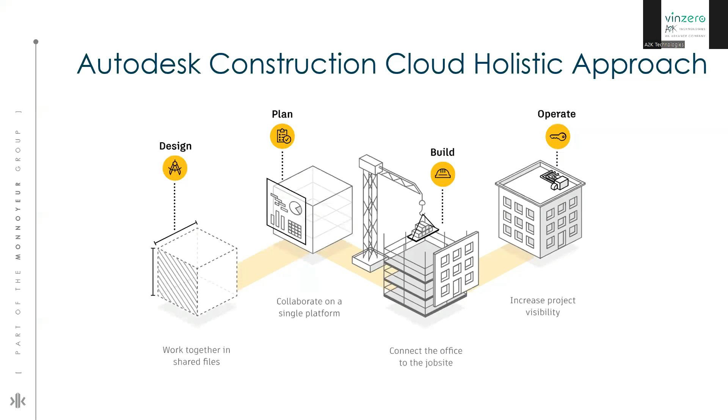There are, for all of these tools, pretty much 2 processes. The first one is the configuration aspect, where you have a project admin setting up all the tools, creating all the information layouts, creating all the information containers, allowing people to access this information, restricting this information to some of them. And then you have the execution, where you have individuals collaborating in the process.

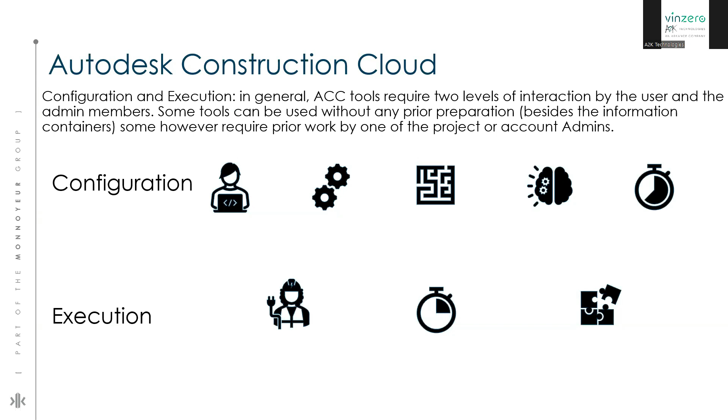For today's topic, the configuration aspect actually is very minimal, because what we're talking about is execution. We're talking about having the data, having access to the data already, and executing certain tools in the data. And that's the reason why today's webinar is very, very focused on markups and review process. From there, we take it to other tools like issues, for example, that require some configuration, but we are not going to focus on that configuration today. We're going to focus on how the markups and documentation reviews tools are allowing us to expand on these other tools within ACC to achieve a very, very powerful level of collaboration and execution.

Now, again, for those who are very new to ACC, this is not an introduction webinar. This is not a webinar where I'm going to introduce you to what is ACC. This is a webinar where I'm assuming all of you know a little bit about ACC.

So there are certain workflows, again, that require certain implementation, certain, let's call it arrangements or configuration. For example, a review process where you submit a file for review. Now, in your case, it could be that you are going to be part of the submit process, that you're going to be asked to review a document.

And this is where the process you might be involved could start. Someone, a PM, a collaborator, a third party might send you a request for review of a document. And that's what we're going to do in a moment. So you need to understand where does that coming from? Well, that happens because someone has a document file that they need you to provide input on.

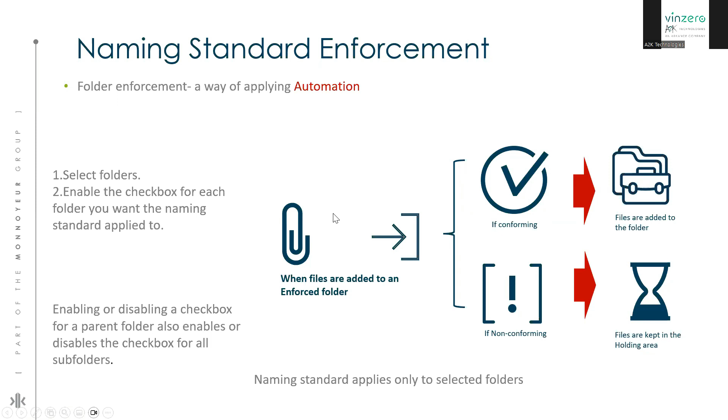I'm not going to dwell too much on this, but some of those rules depend on the project allocation, where the files are going to be, how those files are going to be managed. Maybe you don't need to worry about it so much, but just be aware that's something you need to consider when managing files.

Now, the visualization aspect and the status of the information. Again, this is a little bit of theory before I jump into the practical. Every stage of the information in the process can be very clearly defined.

It could be that the information we're in is a work in progress. Usually we're talking about design work. It could be a preconceptual design, pre-construction design, where changes are going to happen very often and they're well received. It's not a stage where things are settled and defined. It's a stage where things happen.

Again, our revision tools, our digital markups play an important role in this aspect.

Now, the shared stage of the information, which we see here, is when the information leaves the silos. It could be an individual, it could be a group of professionals with the same background that start collaborating between each other. I call this leaving the silos because this is the part where the information doesn't belong to you anymore, it's being sent to someone else.

And again, markups, reviews, that kind of digital feedback is very important here too. Maybe not at the impact that it could have in work in progress within a team, but it does have an impact.

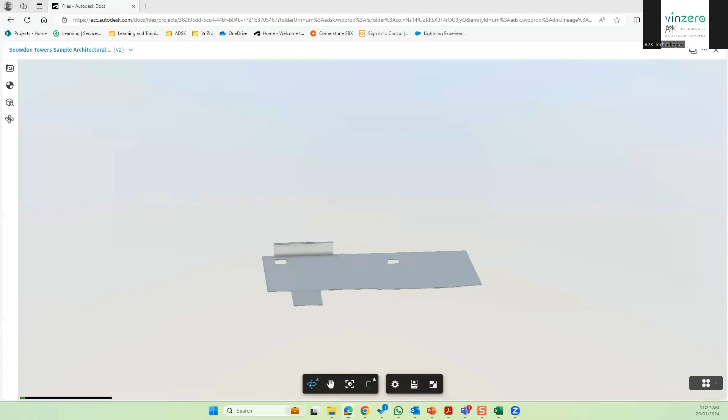So for example, if I open this file, I go directly to the file. And this is the navigation tool - this is the navigation user interface that is going to allow me to see the file.

Now, remember a moment ago when I was talking about the way information is shared, the way information is reviewed. And I mentioned one of the current processes is that model review relies on who can use the desktop application, if they have it, of course. In this case, it doesn't really matter.

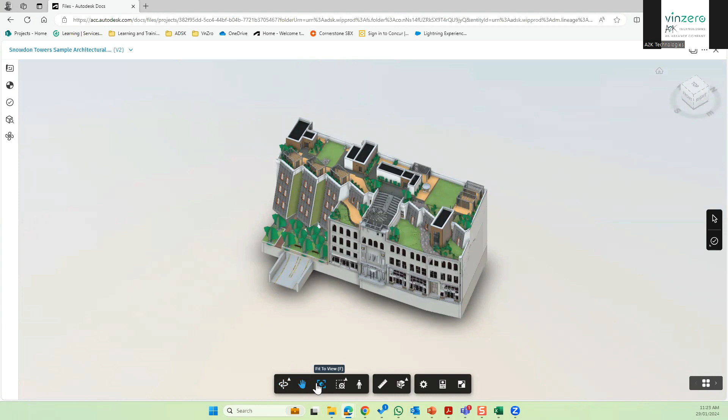You can open this on your phone if you want to. It's an easy URL, very easy to navigate, very intuitive. You can choose pan and orbit, fit the view, zoom in, zoom out, first person view, whatever you want to do. And the point with this tool is that it allows you to review your file - I'm not going to call it drawing, your file. So what do we have here? In this menu on the left side, the sheets and views menu here.

Okay, we have a question from someone. I think everyone can see it. It says we have large drawings, X reference, aerial photos. Harry Thompson is asking this. I'm going to put the question here.

What I'm showing here right now is a Revit model because my demo is very narrow. I cannot go through all the possibilities, but you can open photos here, very large photos, and you can open point clouds too. I love working in point cloud files.

That is scan data from laser scanners, and you can review it here. There are many options to do this. When you talk about a large file, to be honest, I have seen files that are extremely large, multiple gigabytes of data for Revit, which is not recommendable. But a file that is 500 megs or 300 megs, you have no issues about it.

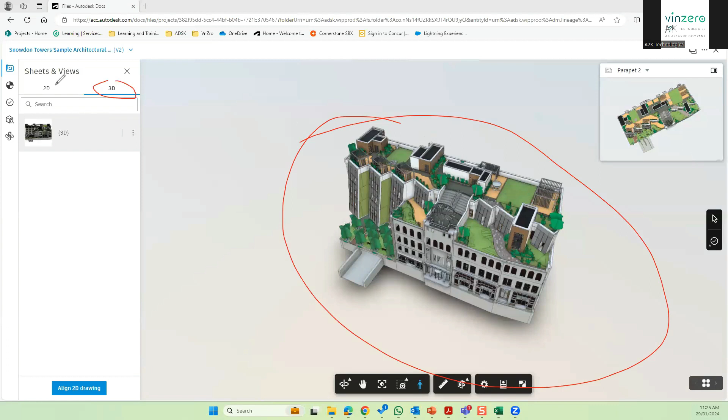If I go here for the 2D drawing version, I'm going to clean up the drawings and switch to the 2D. In this case, there is no 2D, because of the way the model was exported from Revit. But what I want to focus on is this menu here. I'm going to bring a 2D drawing in a moment.

Then you have the levels. You can start navigating the file and all the content. This tool is being designed to be a partner for people modeling in Autodesk products, of course, but that doesn't mean it's limited to that. I'm going to show you later.

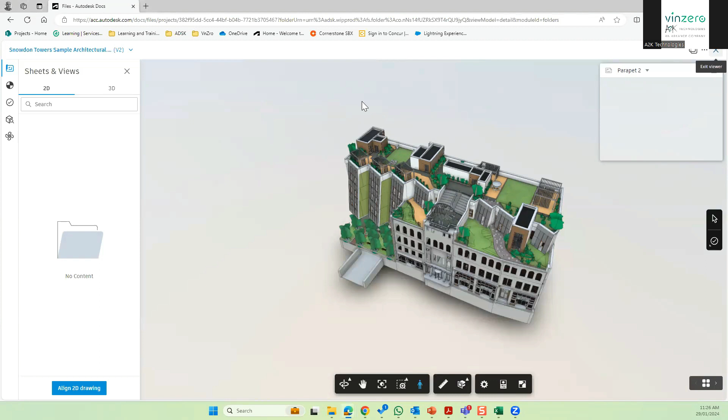So the first point I want to make is how the tool allows you to see 3D drawings in this case, and how it allows you to navigate those drawings. What I'm going to do is close the view, exit the viewer, and go to the next drawing.

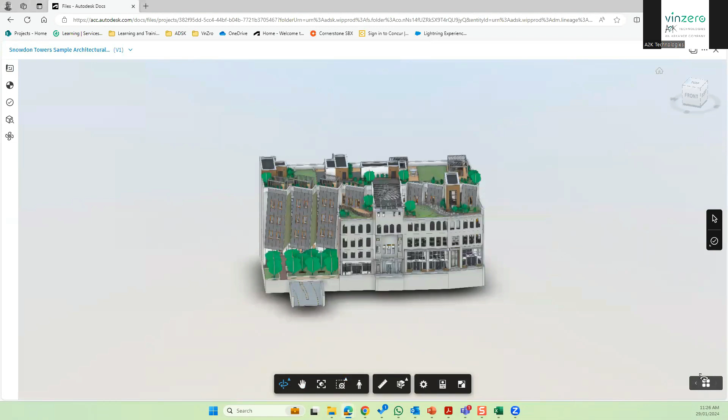It's opening the drawing. I'm going to see if there are 2D drawings or not. There are no 2D drawings, there is a 3D model. So I'm going to jump to another file. Again, this is for navigation. There are multiple things you can do here in terms of navigating.

You can create a section. Now what I'm going to do is go to my other folder, and quickly show you what happens with these Microsoft Office files. You can open them there, so don't feel limited by the tools that you have.

What I'm going to do here is bring a file. I'll take a file from my computer and bring it here. There are two options for doing that: you can upload a file, or publish a file from Revit, or just drag the file and bring it here. I'm going to navigate to find it.

Just give me a second while I navigate to find the file I want to bring and show you what it's like. Okay, so this is the file I want to open in ACC, and I'm going to show it to you in the Acrobat Reader, the PDF reader, first. So this is the file that I have.

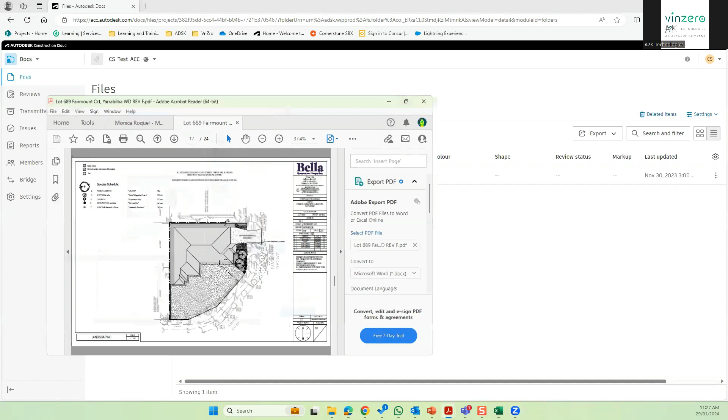I'm explaining this all in the context of my background as an architect. Let's say I have a house and the owner is asking me to help design the swimming pool area and the landscape. There are multiple ways of doing this. I could just print this out and work on it, export it to Revit, or even use the Acrobat Reader and work on it with some of the tools we have here, very poorly, to start sketching what I need.

But that's not what I want. What I want is more tools to do digital drafting, digital review, and also to keep the file within the project. That's something we need to understand. When I keep the file in the project, I'm bringing a high level of confidentiality and protection to that information. While if you exchange files back and forth, they become available to anyone who has access to those emails. There is another important aspect.

I'm going to first bring the file here. I could just drop it here, right? So I'm dropping the file.

And it's telling me that it's a file from my computer, a 2.8 megabyte PDF file. So I'm going to tell you an experience that I had when COVID happened.

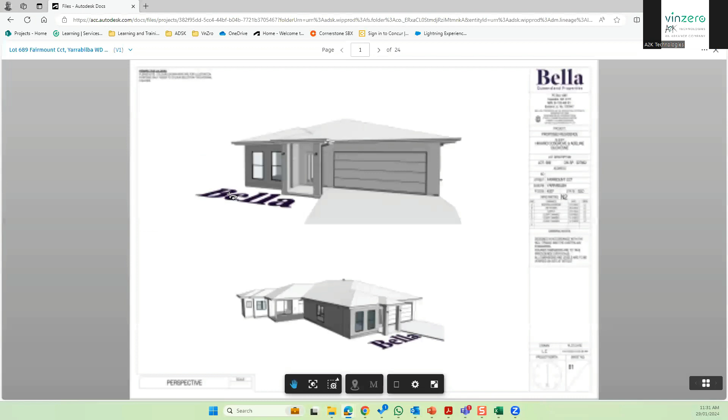So what I'm going to do here is, I have a drawing here, right? And I'm going to click on it. If you notice already, that is a PDF drawing, not a model. What you see here, there's no 3D option because I'm opening directly a 2D drawing.

Most people work with this type of document for the topic we're covering today. The reason is because a lot of companies are still printing this out, reviewing it, and scanning or taking a picture of it, which is a very dangerous way of working.

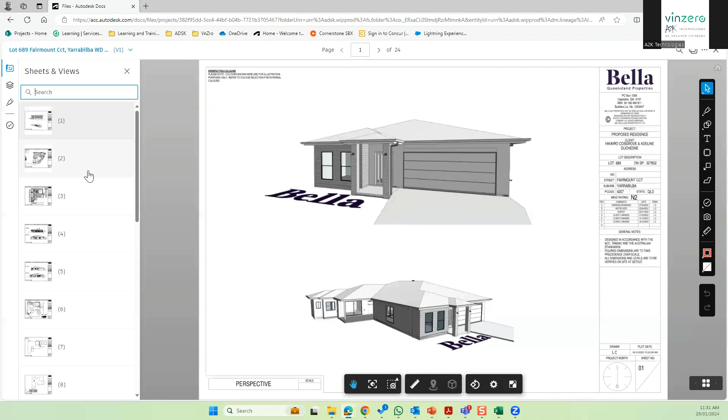Now I have my drawing here. By default, the difference between opening this drawing in ACC and opening this drawing in Adobe Acrobat is that here, of course, I have the pages and everything, right? But in ACC, you have the pages in separation. I'm going to show you one of the biggest differences.

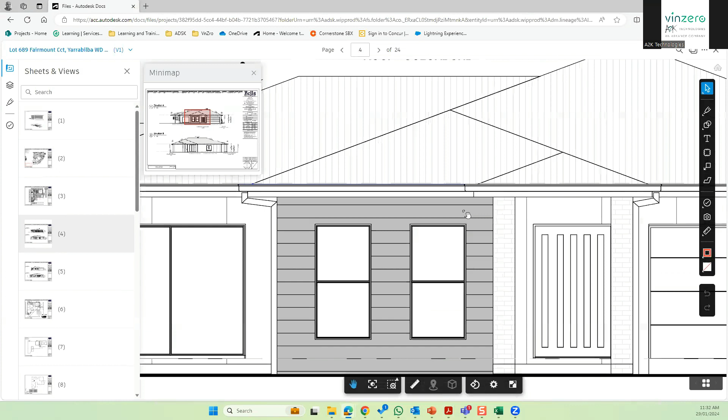When I zoom in, the quality remains the same. And I don't know if you can see how I'm clicking on objects - the drawing is recognized as such.

Now, this drawing, actually, I wanted to make this demo more realistic. This is a drawing that was given to me - it's not something that I generated. This is actually a drawing from a friend. I asked them if I could have the drawings of the house so I could do this demo, and they said it was fine. This is literally a drawing that was given to me.

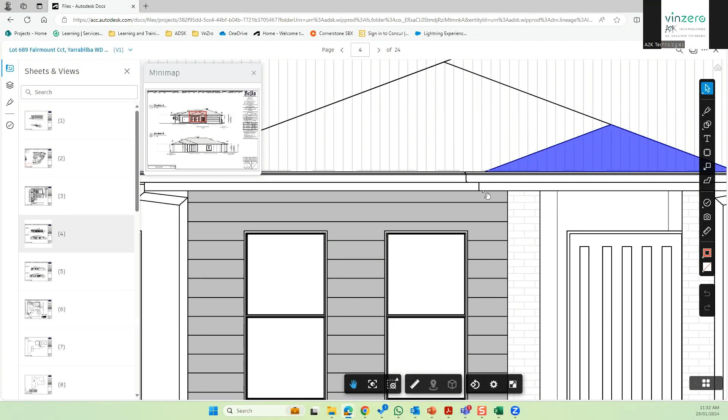I had no idea when I got the drawing if it was properly done in Revit or AutoCAD. That's a situation you might be in. But in this case, it's not a scanned drawing from an image - this is an actual drawing that was created in a CAD software.

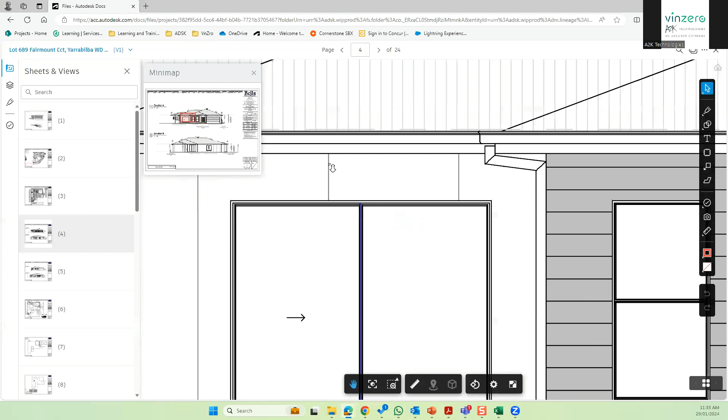So this is the situation you're probably going to face, where you have a drawing and Autodesk Construction Cloud is going to allow you to touch on those elements of the drawing as you go. But that's not what we want to focus on today. We want to focus on what I do with this.

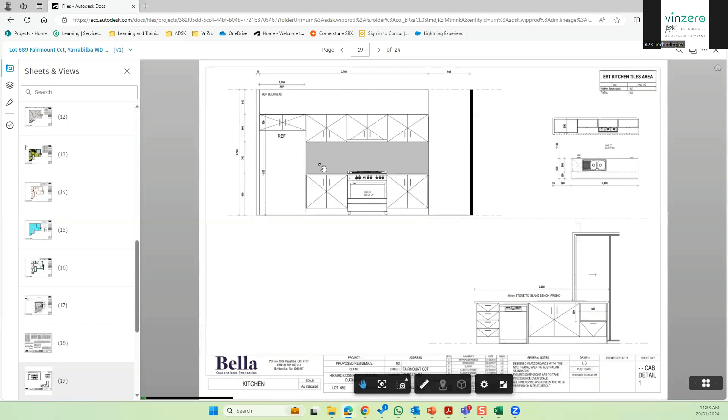How do I provide feedback to my client on the changes that I want? It could be something very simple. You can even send this to your own client, and the client can tell you just by making changes here what they want. They say, okay, this is too high, right? They can draw a line and tell you this is not what they want.

Let's say we're not talking about a professional, we're talking about a client. They say, no, I don't want gas, I want electrical. I don't want electric, I want gas.

People can draw pretty much with the basic tools that you see here on the right. I'm using the marker, and I'm going to navigate all these tools one by one. I needed to give you context of these tools today, but to be honest, these tools by themselves are very complex in terms of how much you can do.

It's very easy to use them, extremely easy. But what you can do with this is incredible. It's very, very, very rich.

So I'm going to just quickly navigate through the tools that we have. We have selection, which is what I used a moment ago, right?

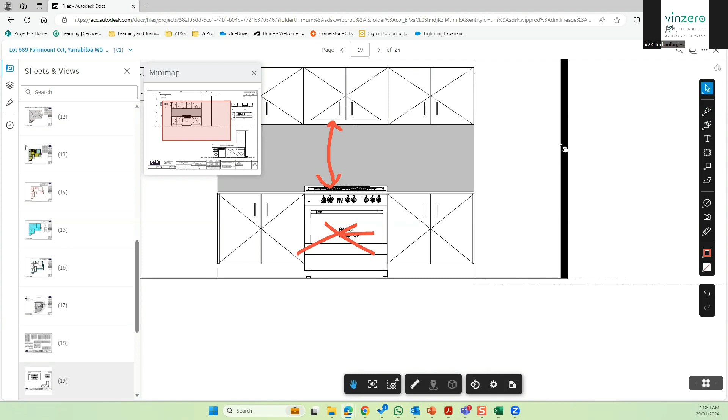And then you can go and select objects. Now, if that object is that you select, remember, you need to always remind yourself, it's a drawing. It's not a model, it's not an element. You can highlight it, you can touch it, but you cannot move it because it's like if you were working on top of a piece of paper.

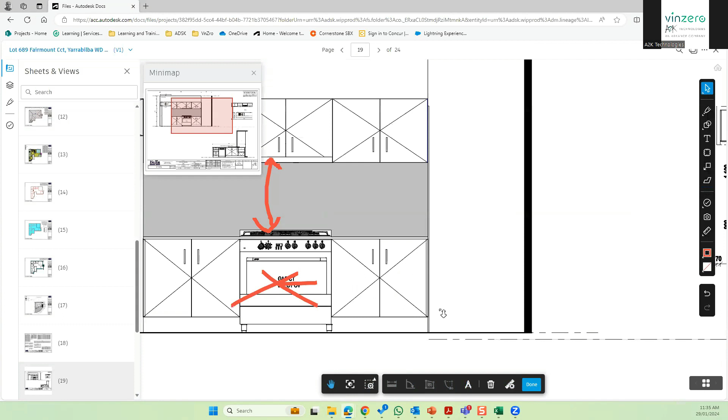I'm not going to go into this anymore. What you could do is you could measure things. So if I want to go and measure something, I can touch those objects and use them as a reference to measure. Now, in this case, if you notice at the bottom, it's not letting me measure anything.

The reason is because I need to set up the measurement settings. In this case, I'm going to use millimeters with a precision of 0. And there is an option for free measurement. I don't like using free measurement, I like to use it with references.

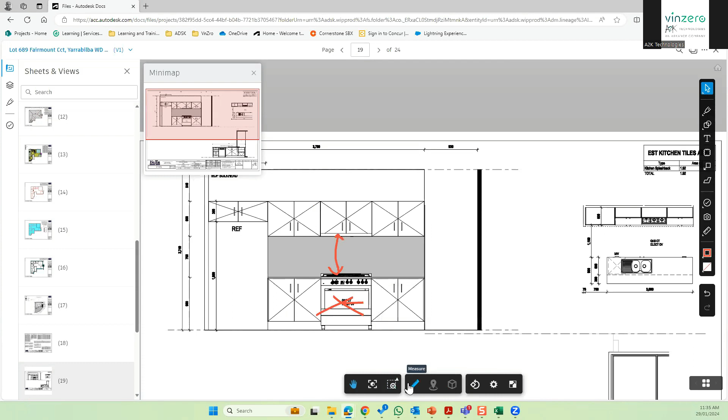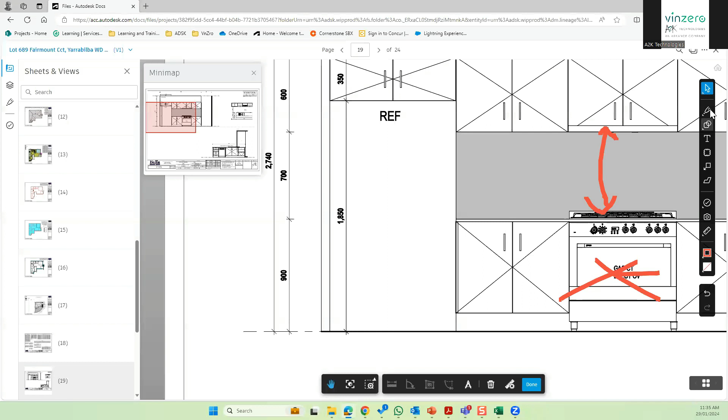I say done. And the other thing that you might have to do, again, as I said, this is a drawing that I received, I didn't create it, and that's most of the scenarios you're going to see — you're going to have to calibrate it. How do you calibrate? You only need one measurement. So if I go here and I touch this object...

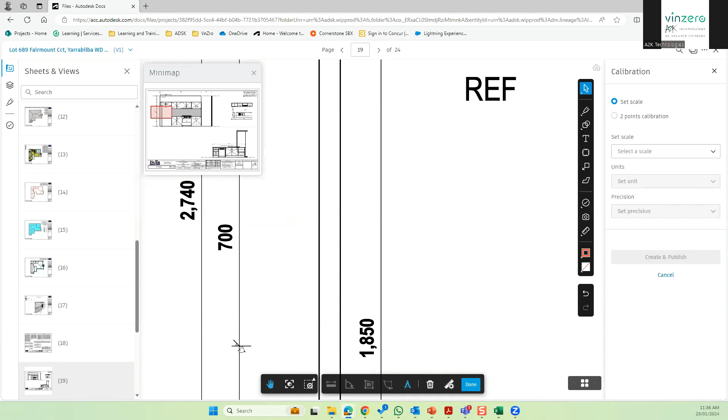When I calibrate, so I'm going to set the scale, 2-point calibration, millimeters, this point to this point. This is one option to calibrate the drawing.

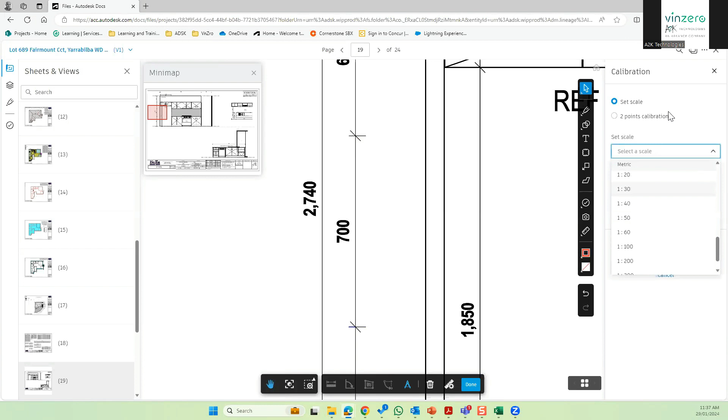The other option is — I'm going to click this again. You need type precision. Select the scale. You can select the scale of the drawing if you have it. You can select the units, and then you enter.

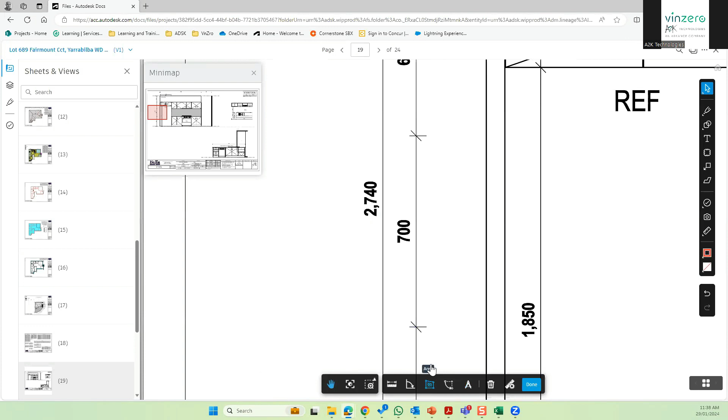And this is just one of the things that you might have to do, but most of the time we're expecting you not to have to do this, because the drawing should come calibrated already if it was generated in Revit. In my case, this drawing was probably not generated in Revit, even though it has the measurements and all the objects. But if you see now that I measure freely, I have the option at the bottom to measure, I can drag. Now I have the measurements missing by 1 millimeter in this case.

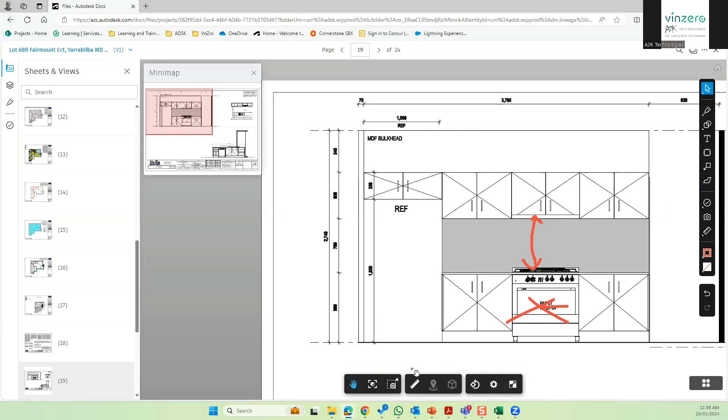I was rushing a little bit with the drawing, but you get the point. What I did is now all my drawing, no matter where I measure, this drawing specifically is calibrated. Now, that's not the case for all the drawings — you might have to switch the scale accordingly. But again, 99% of the cases, if this drawing was created properly in Revit, for example, you won't have to worry about it, you can just measure freely.

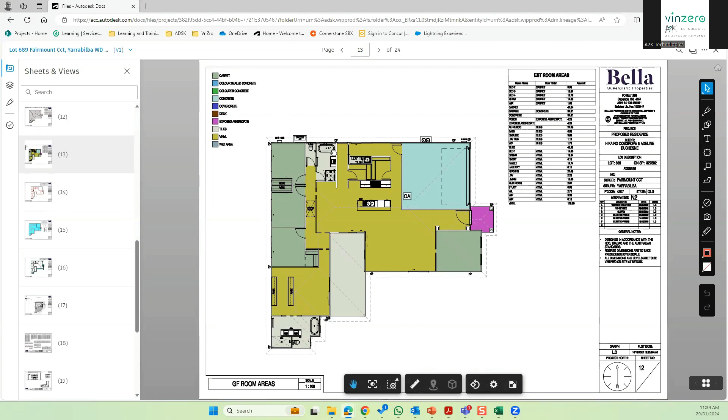I'm going to do that in a moment with the 3D model. What I want to focus on now is, if the worst case scenario is that your drawing is not calibrated, you can always do that — there are other tools. In this case, the 3D navigation tools are not available, of course, because it's a 2D drawing. But the focus that I want to give right now is I want to work on this drawing.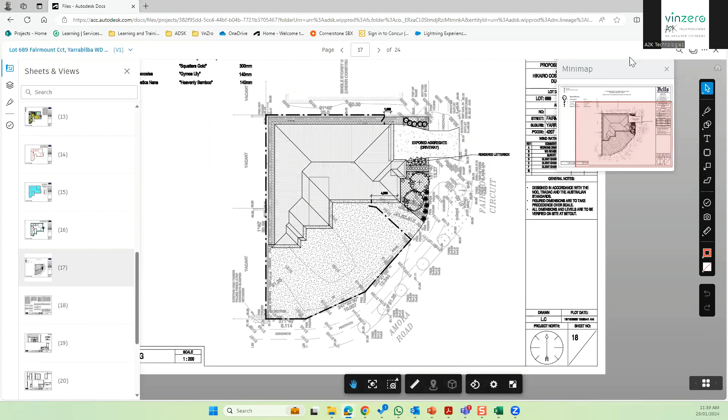I want to start creating things in this drawing, and for that, I'm going to zoom in. You're going to have this minimap on top that is going to allow you to see where you are. You can put it aside. That happens especially when you have large floor plans where you're navigating, let's say, an office building, from one place to another, and you forget where you are.

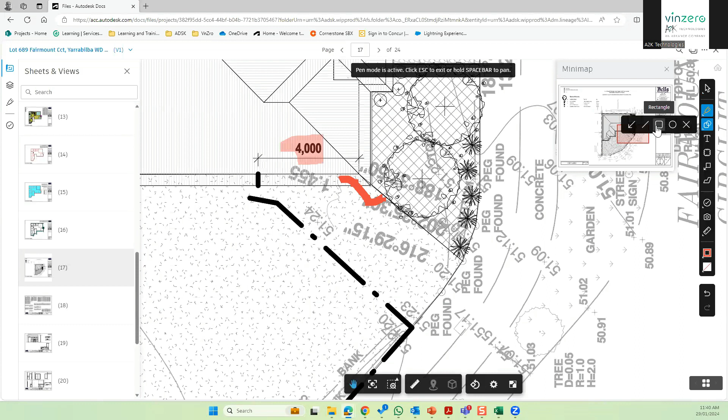This one is very simple because all we have is a roof plan and some landscape, so it's almost impossible to get lost. But what I can do here is now where I kick in the creative aspect — I start working with the drawing, with the shapes, with the text, cloud tools, callouts. These are the main tools. I can create a polygon, and I'll talk about this in a moment, issues and photos. So with drawing, of course, very simple, you can highlight things, you can draw objects — in this case, freehand lines. But what I want to do here is create a rectangle.

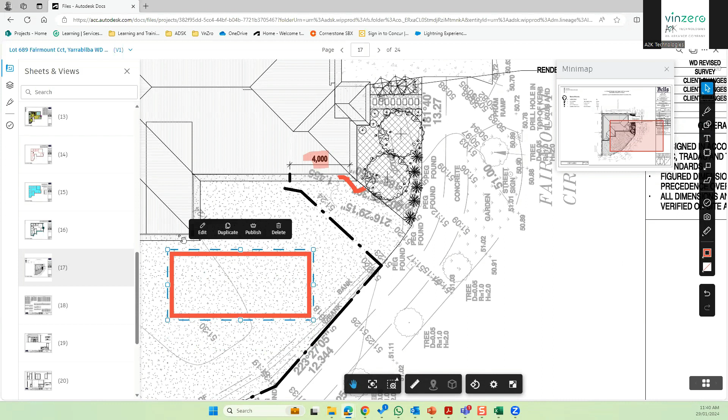So follow me here, please. Now that I have this rectangle, I can modify it. I can move it, I can go and click on it again, and I can edit it. Going to editing, I have all these tools where I can change the color of the edge, the opacity of the line, the thickness of the line, and I can add a color with a certain level of transparency.

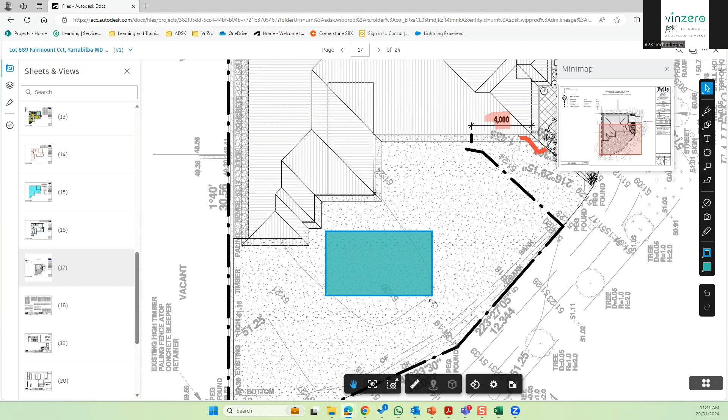Now, this is just a rectangle. So let's say I'm suggesting they want to build a swimming pool. They already told me the measurements of the swimming pool, so I'm going to edit it. I'll leave it the way it is, or maybe make it a little bit smaller. And then I can add the text here that says... let me just go back to where it was.

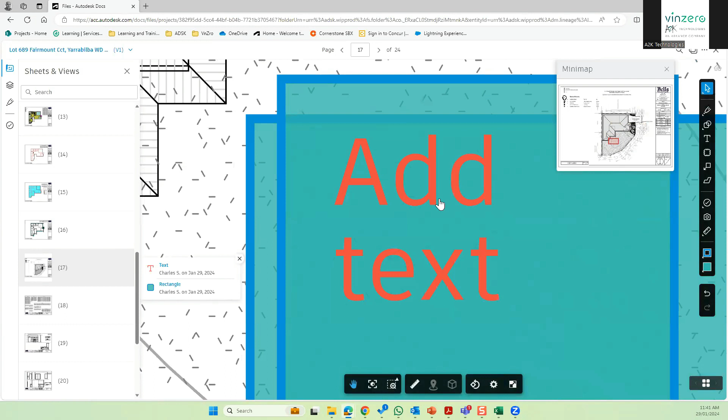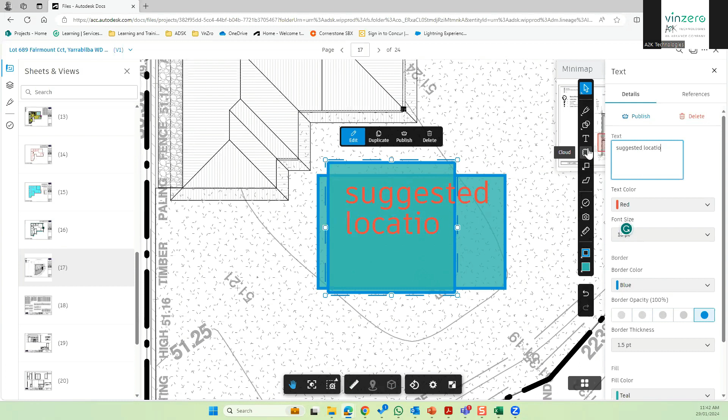Now, if you notice, the text is similar to when you're working on PowerPoint, where the text is going to have a border color, a background color. So I'm going to change the text that says suggested location for pool. Then I'm going to change the color of the text, change the size of the text, and eliminate the border of the rectangle.

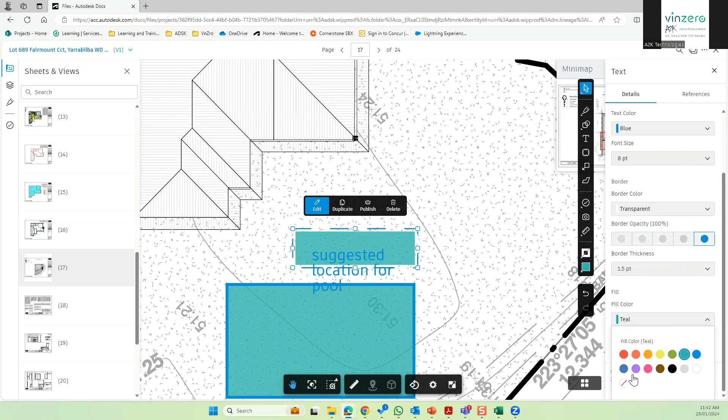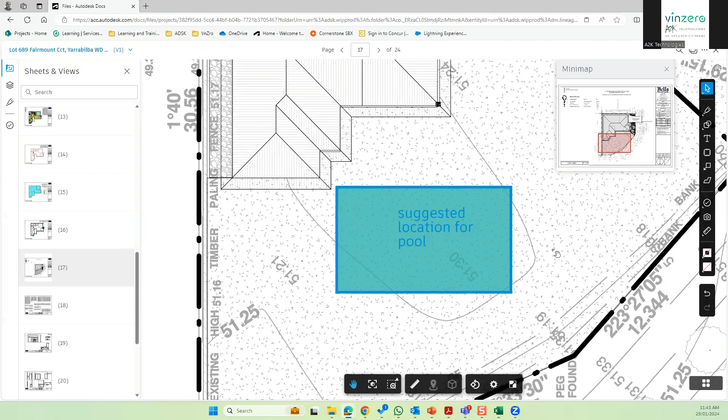And again, you're going to see a similar situation to what you notice when working in, I guess PowerPoint is the best example, where all the shapes that you're creating, and many of you are probably used to working with PowerPoint to create notes on an object. So now I'm going to take the pool, put it down here, and there you go. So I can say, okay, this is the suggested location for the pool.

I've seen examples, and because it's time consuming I can't go through all of it, where the architect actually goes and designs on top of the drawing using all these tools. Now, that is not the purpose of the tool. For that, we have AutoCAD, we have Revit, where you can actually design. But you can start working on more creative approaches. For example, you can say, okay, I'm going to have this area as an area with trees. You can use multiple shapes to suggest, let's say, trees.

In this case, I'm going to modify it. Once you create it, you click on it, you edit it, and then you can start modifying the colors. So let's see, I'm going to use green, and here I'm going to use green too. There you go. And you can take this and duplicate it.

And let's say this is going to be the adding of trees, where you're going to suggest adding trees to the east facade. So you can use text again, or you can use a callout. And with the callout, by default, it's going to bring the same properties. Trees. And then I can just modify the border color to zero, the border color to zero. The text is going to be green, and then the fill is going to be none.

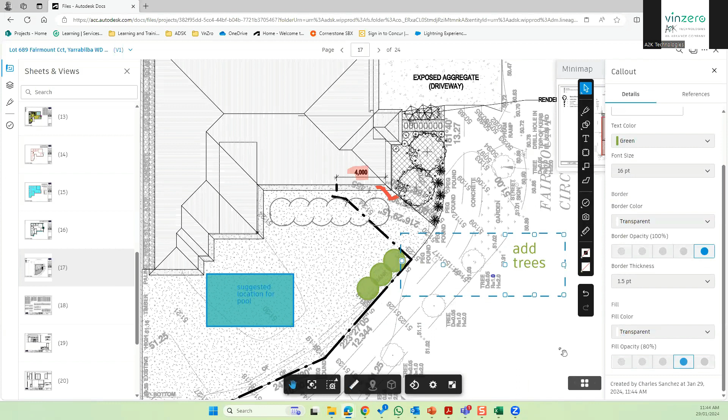So again, I modify everything in the color, but let's go and create a new one here. I can move it actually here. I'm going to change the line, and I don't want to dwell on this too much. There you go. Zoom in. And there you go, I created a callout for that.

And again, this can be used either to generate suggestions, to generate reviews, to create actions. In this case, when creating actions, I could go on and on making changes to this drawing, adding comments, modifying, including data. But one of the tools that is more practical in terms of managing information and generating new actions is issues.

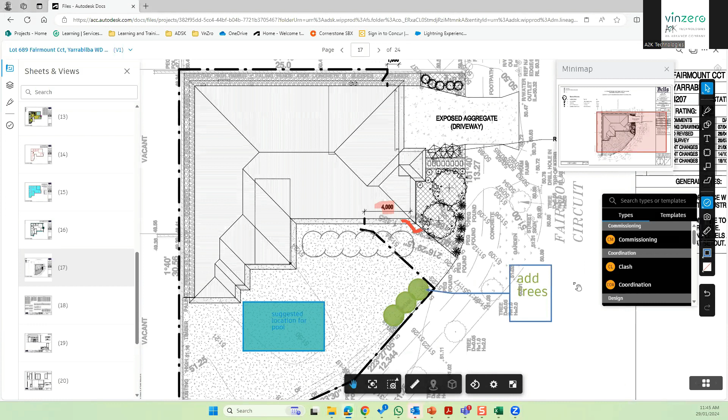Now, what issues are in ACC, for those who are not familiar, is you generate an action where you are highlighting a problem, and you're telling the person who generated this drawing that there is something going on and you need them to do something about it. Actually, I have a coworker who doesn't like the term issues. He likes to call it something like actions to be taken, because issues aren't always something negative. Issues could just be the need for an action. So in this case, I'm going to quickly add an issue to this drawing, and you'll see how ACC allows you to select the type of issue.

So in this case, I'm going to select an observation, and I select where I want that observation to be. Let's say that observation is in terms of the location of the roof against the property line, so it's just too close to the property line. And I want to highlight that I believe this could be taken into consideration.

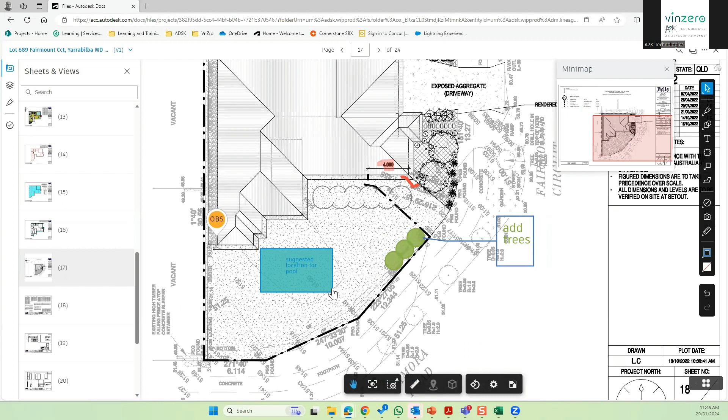So Autodesk Construction Cloud, because I selected the type of issue, is going to write down OBS as observation, and it's going to tell me there is something here. The person who comes and sees this drawing is not only going to see my design notes, right? Trees, location for the pool, highlighting here the 4,000 millimeter line, etc.

I can even delete a markup that I don't like. Actually, I don't like these markups, I need to delete them. But when I go to an issue, I can detail on that issue and I can take actions. I can rename it, I can change the status to something that is pending, is in review, is closed.

And again, this is because the issue is calling other people to take action on it. I can add detail, and I can say a roof line too close to property line, right? So it's just an observation. I'm not saying there is something wrong about it, I'm not saying I want something to be changed.

It's just an observation. If eventually someone comes to the project and says, Charles, but you didn't say anything about it, I said, no, I did. I created an issue, it was an observation. And I asked my coworker, Rahul, to be a watcher. If you don't know what that means, you put your mouse on top of the information logo, and it says that the watcher is going to be a person who is not expected to do anything. It's just a person that is aware of that.

So again, the topic for today is not issues, I wish we had more time to focus on it, but it's a very extensive topic. What I wanted to tell you here is how I can combine my markup tools to expand into other review tools like issues. So I'm going to say, okay, I want Rahul to be a watcher, and I can start adding information. I can even say I want this to be reviewed, I want this to be done by the 31st of January, by this week.

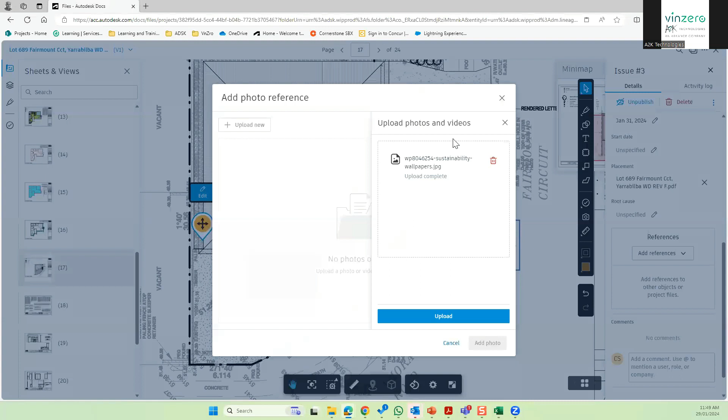So I'm going to add a random photo of a background, just to show you what happens when you add a photo. Now this tool is very useful. If you have in your hands an iPad Pro and you're on site doing this type of markup, which with an iPad Pro and a stylus is very nice to do, you can take a picture on the spot and then add that photo. So this is my photo, right? I already added a photo to the issue.

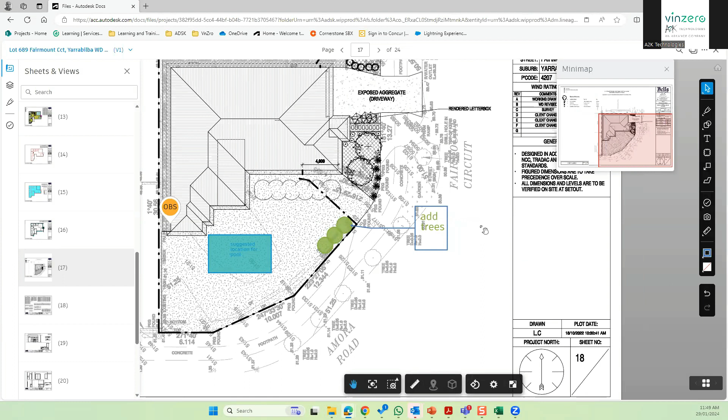And you can keep building and building on the issues. So when someone opens your drawing, they're going to find all these sets of information that are going to be part of your review. If you want to, you can add a photo directly by clicking here.

You select where the photo is going to be. I'm going to select this corner, right? And then the logo is going to be there. Then I can navigate and find the photo, I can go and add the photo. I'm going to upload the same photo that I had a moment ago, just to show you what happens.

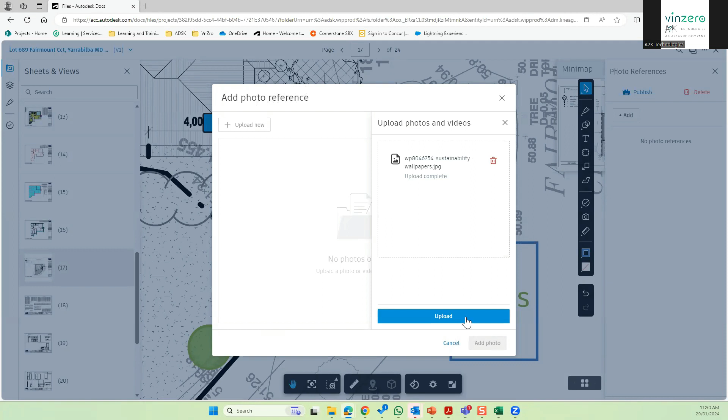It could be a photo taken on site. This is just a wallpaper to illustrate because the green makes it easy to read it. And there you are. So you can have photos in your review, and when you click on it, the photo is going to appear there. And again, on and on and on.

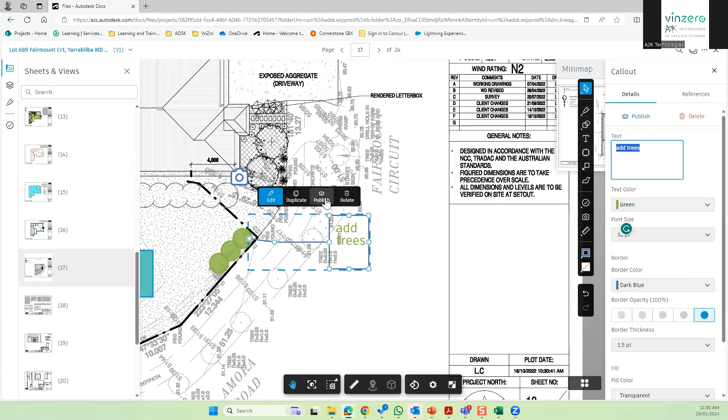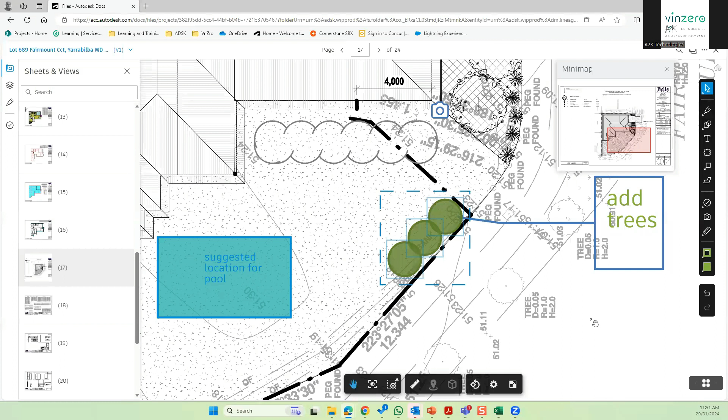And to wrap up, because I want to have some minutes for questions: if you notice, when I do a markup, I have the option to publish it, and it's that little crown that I mentioned a moment ago. So if you notice in this drawing, I have multiple notes, rectangles, issues, drawings, but I'm going to take only these circles, shift and select them, and publish only the 3 of them. So I have 3 drawings published, 3 markups published. I'm going to close the drawing, and now when I go to my folder, I'm going to refresh this.

You're going to notice that this drawing now has markups. It has 11 unpublished markups that only I can see, which are private. That allows you to work on that drawing before people can see what you're doing. And I have 3 markups that are published.

If I wanted, I can also display if I have issues or not, etc. Again, this is a very powerful tool. I wanted to give you some context.

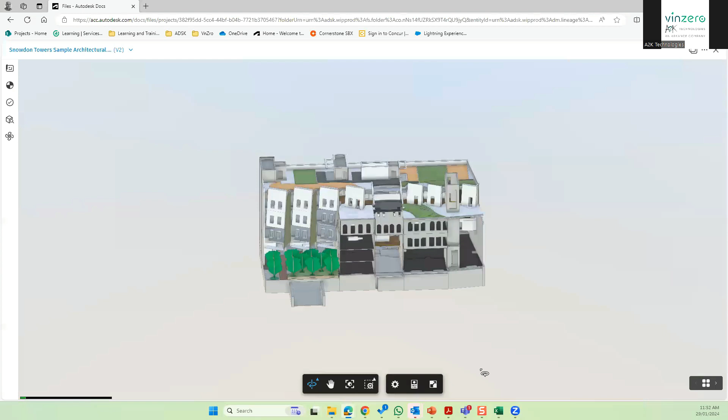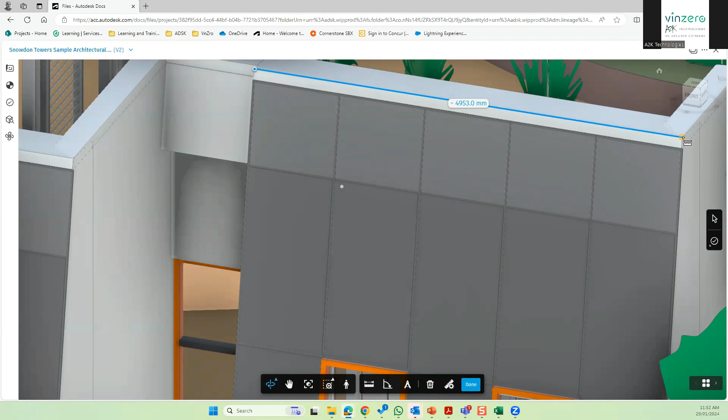You could do exactly the same when it comes to 3D drawings. You can navigate those 3D drawings and extract information from them. If you notice here, because this is at scale from Revit, I can just measure directly. The difference is because the drawing from a moment ago was exported and given to me as a PDF, I need to calibrate it first, and also each page has different scales. But this one is generated directly from Revit and given to me in its original form.

So I can, just like I did a moment ago, create an issue, navigate this, etc. It's just one of the many advantages of being able to see this information in Autodesk Construction Cloud.

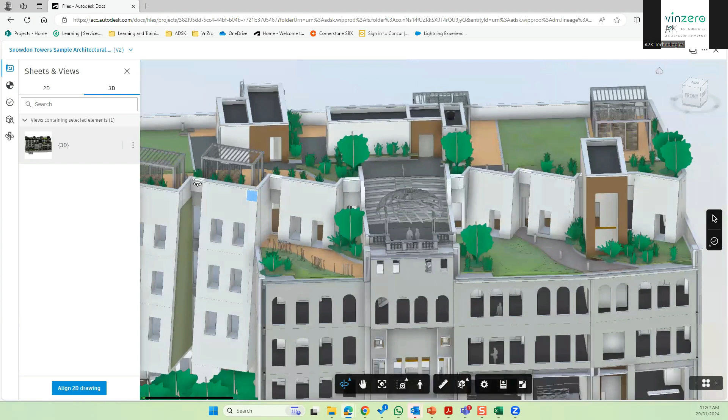I'm gonna stop here and see if there are any questions. I know there is a question about bringing aerial photos into the projects and managing large reference files.

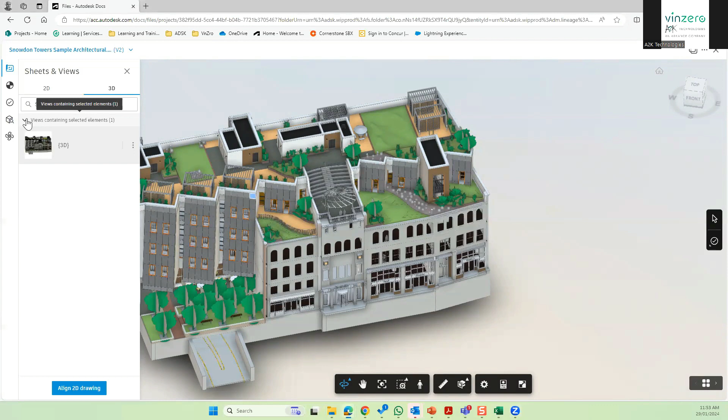Again, you could bring all types of information. You can even compare drawings and make notes on those drawings if you want to. There are many options depending on the nature of your files. What I'm showing you here is the most basic approach, pretty much a native file from Revit, where I have a lot of control over the data. Sometimes that is not the case.

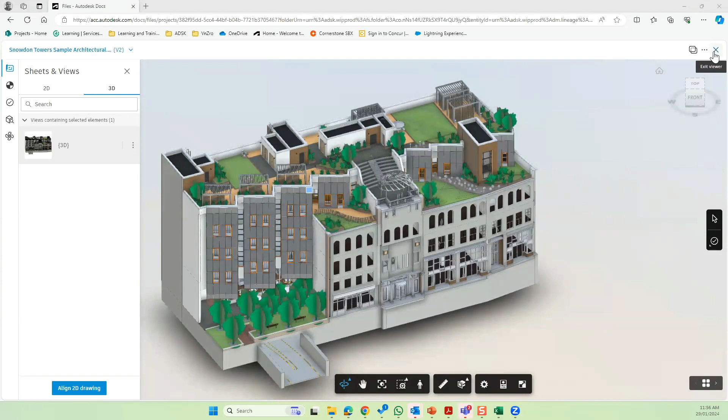So going back to my 2D drawing from a moment ago, when you create a markup here, what's going to happen is everything in your drawing is going to be according to that scale. It's like if you're literally drawing on top of that.

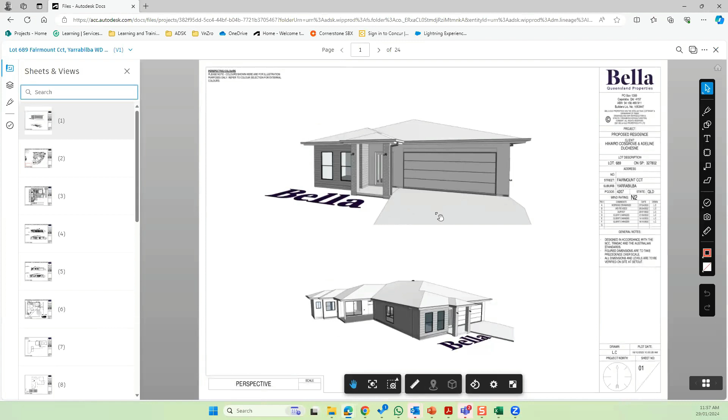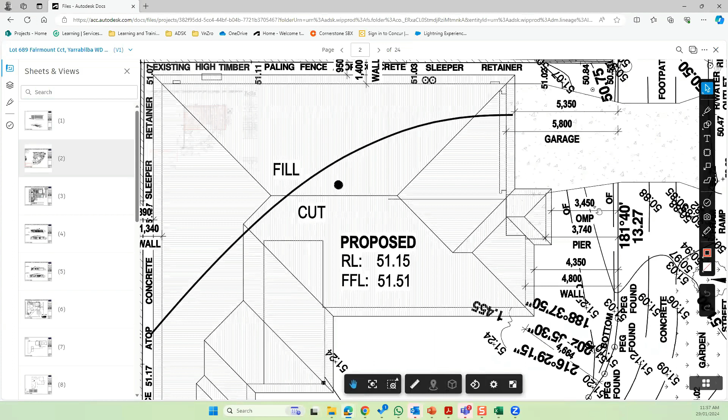Let me see if I have an example. This one, 001. When I open this drawing, actually this is a very challenging drawing. That's what I really like about it, because you have perspective, you have 3D views. My recommendation is, I didn't want to give you a perfect scenario, so if you notice here, this drawing is not at scale.

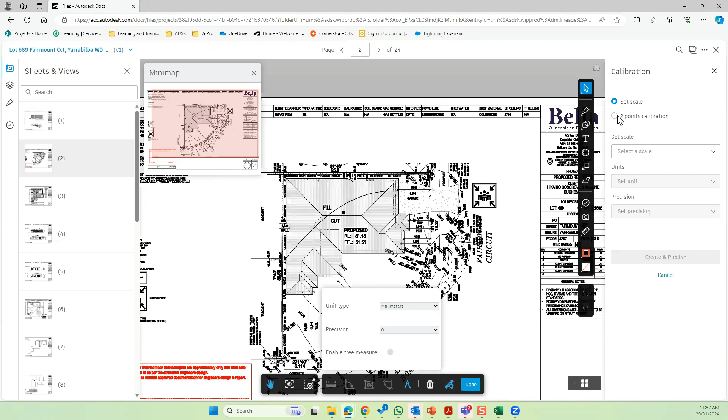If I go and measure it, because of this new sheet, it's not going to let me measure it until I establish the settings, but most importantly, I calibrate that drawing. Once I calibrate that drawing, it's going to apply to this sheet. So I'm just going to use the 2-point calibration very quickly.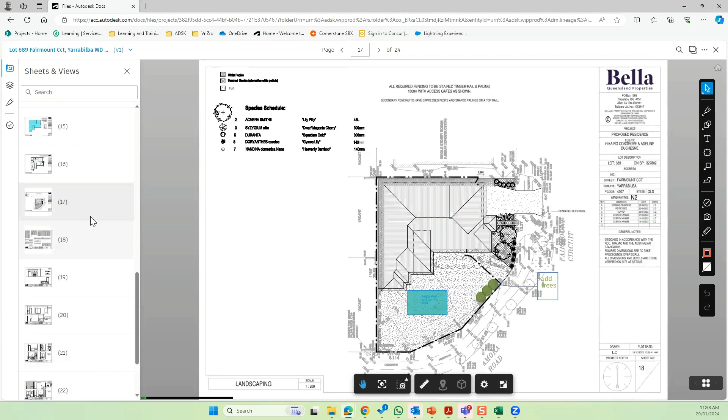And I'll give it... so once I finish the 2-point calibration it's going to apply it to this one. You remember in my previous drawing, I already ran the calibration here, right? So I already did the calibration there, but it still asked me the calibration for the other drawings. This swimming pool that I drew very poorly here, if you go and measure, you're going to be able to measure it.

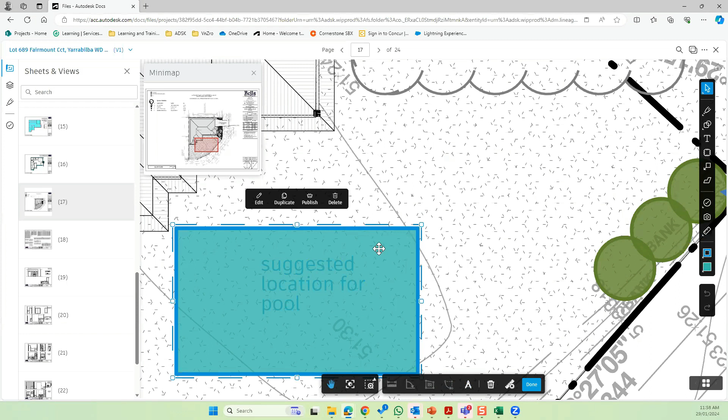Okay, or you can go and click on the properties of the drawing, but I need to calibrate it again. It's asking to calibrate it. But everything that is being drawn here, everything that I have here, is going to be at scale.

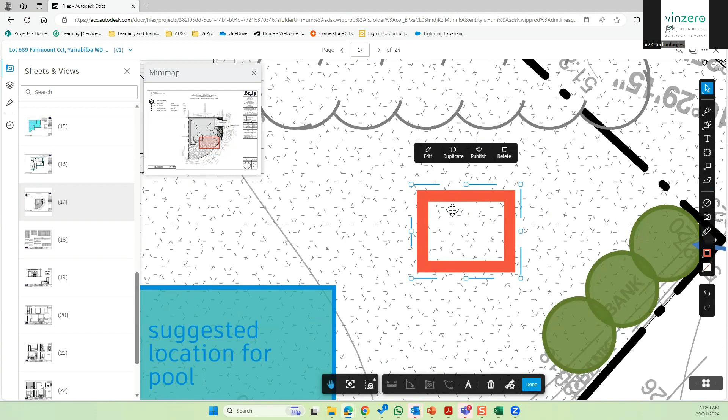Everything you do here is going to be like drawing on a CAD drawing. So it's a great question, but only if you are drawing. Like if I'm going to create a new element here, and I want it at scale, I want this to follow a scale, I can do that. It's going to follow the scale, it's going to have proportion with the rest of the drawing. It doesn't change in sizes.

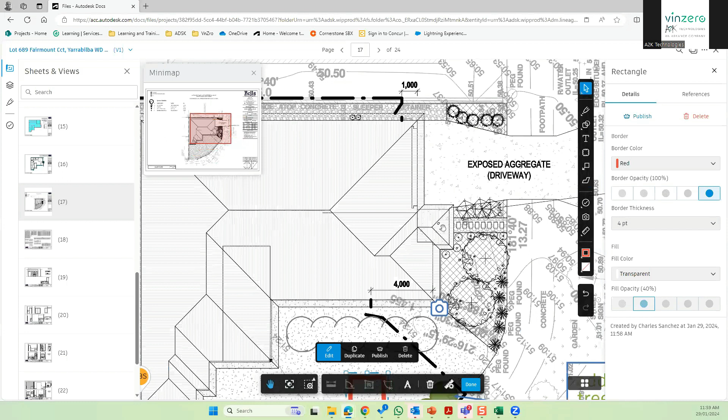But I will recommend that only if you are drawing actively on your PDF. Otherwise, if you're creating an annotation, if you're creating a cloud revision, you will have to do it based on what you have here, how much space. For example, I probably will use all the space that I have here. I'm going to create a cloud, and I'll use all the space that I have here to create all my annotations for this drawing, so the drawing becomes clear and doesn't become too heavy.

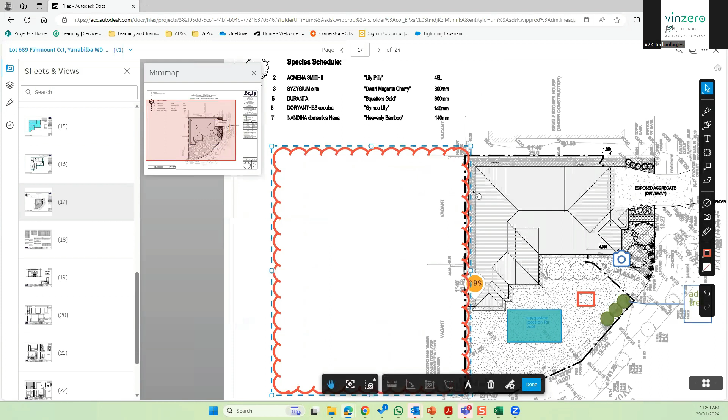And I avoid... but again, these are practices. I will avoid having annotations on top of this because this drawing is already very messy and has a lot of information. I will probably create all my annotations here, blah, blah, blah, right? So all your annotations, all your comments will go here, and then you can create a callout.

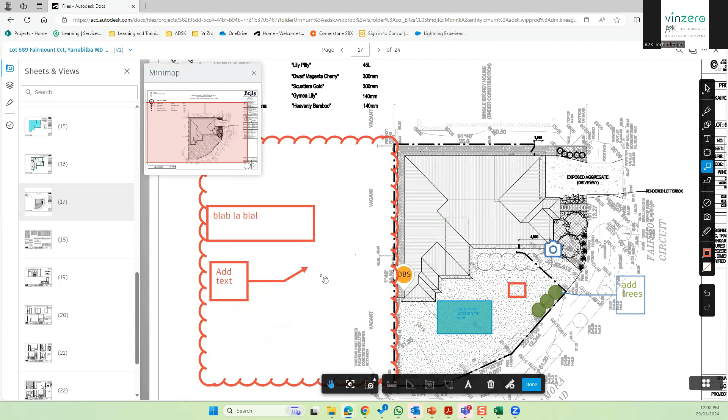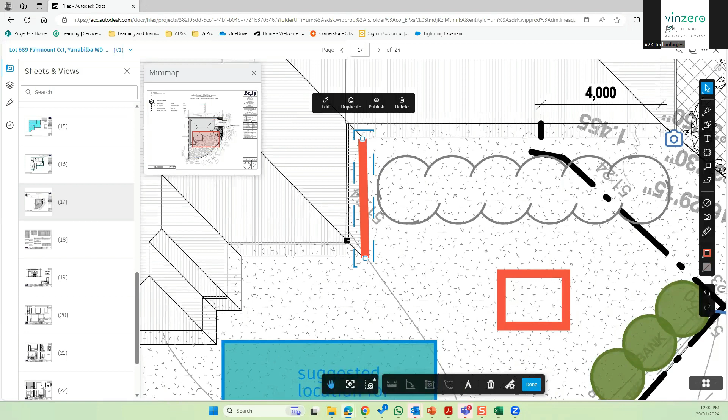But that's you playing with the space that you have. If you're going to actively design or highlight something, then you do it on top of the drawing and you start doing everything according to the scale of the drawing. So yes, you can do that, but you need to be strategic with how you organize your markups and which ones you're going to publish or not. You can always delete them too.

So I hope this was valuable to all of you. Please reach out if you have any questions. We didn't go with a very extensive introduction to ACC, I'm expecting all of you to know a little bit about it. The focus was just to show you what you could do with annotations in ACC, and again, this is something I could share with anyone in the project, and I could do a lot of other things with these tools from here.